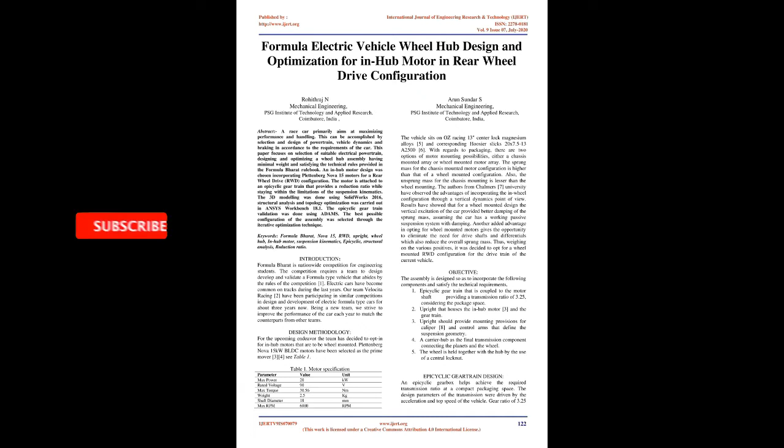Formula electric vehicle wheel hub design and optimization for in-hub motor and rear-wheel drive configuration. Abstract: A race car primarily aims at maximizing performance and handling. This can be accomplished by selection and design of powertrain, vehicle dynamics, and braking in accordance to the requirements of the car. This paper focuses on selection of suitable electrical powertrain, designing and optimizing a wheel hub assembly having minimal weight and satisfying the technical rules provided in the Formula Bharat rulebook.

An in-hub motor design was chosen incorporating Plettenberg Nova 15 motors for a rear-wheel drive, RWD, configuration. The motor is attached to an epicyclic gear train that provides a reduction ratio while staying within the limitations of the suspension kinematics. The 3D modeling was done using SolidWorks 2016. Structural analysis and topology optimization was carried out in ANSYS Workbench 18.1.

The epicyclic gear train validation was done using ADAMS. The best possible configuration of the assembly was selected through the iterative optimization technique. Keywords: Formula Bharat, Nova 15, RWD, upright, wheel hub, in-hub motor, suspension kinematics, epicyclic, structural analysis, reduction ratio.

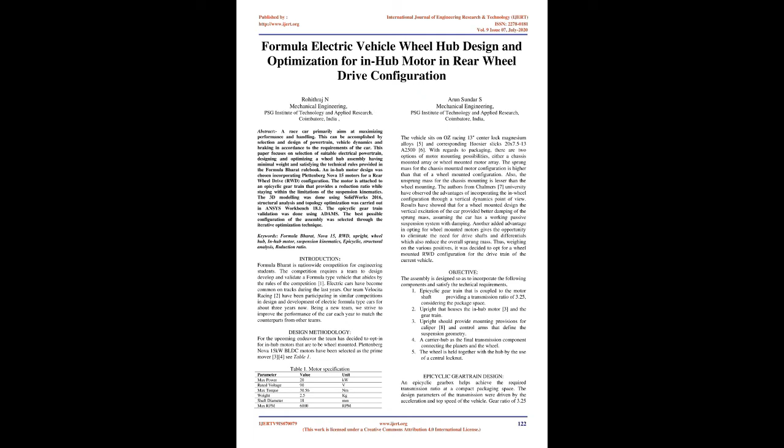Introduction. Formula Bharat is a nationwide competition for engineering students. The competition requires a team to design, develop and validate a formula-type vehicle that abides by the rules of the competition. Electric cars have become common on tracks during the last years. Our team Velocita Racing has been participating in similar competitions in design and development of electric formula-type cars for about 3 years now. Being a new team, we strive to improve the performance of the car each year to match the counterparts from other teams.

Design methodology. For the upcoming endeavor, the team has decided to opt in for in-hub motors that are to be wheel-mounted. Plettenberg Nova 15 kW BLDC motors have been selected as the prime mover, Table 1. The vehicle sits on 13 inch center lock magnesium alloys and corresponding Hoosier Slicks 20x7.5-13 A2500. With regards to packaging, there are two options of motor mounting possibilities, either a chassis-mounted array or wheel-mounted motor array.

The sprung mass for the chassis-mounted motor configuration is higher than that of a wheel-mounted configuration. Also, the unsprung mass for the chassis mounting is lesser than the wheel mounting. The authors from Chalmers University have observed the advantages of incorporating the in-wheel configuration through a vertical dynamics point of view. Results have showed that for a wheel-mounted design the vertical excitation of the car provided better damping of the sprung mass, assuming the car has a working passive suspension system with damping.

Another added advantage in opting for wheel-mounted motors is the opportunity to eliminate the need for drive shafts and differentials, which also reduces the overall sprung mass. Thus, weighing the various positives, it was decided to opt for a wheel-mounted RWD configuration for the drivetrain of the current vehicle. Objective. The assembly is designed so as to incorporate the following components and satisfy the technical requirements.

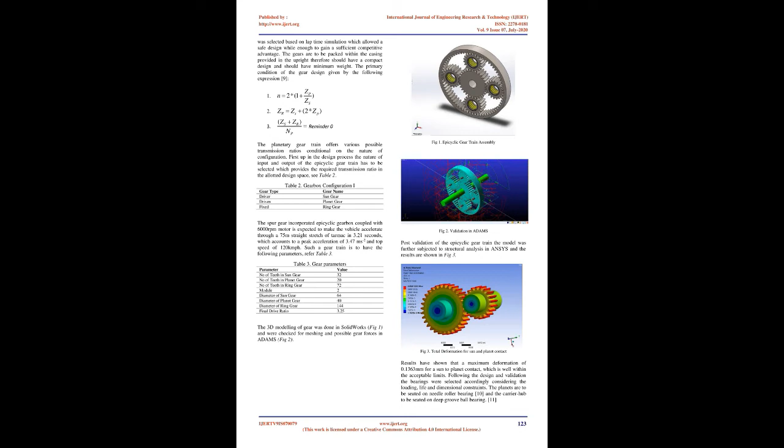1, an epicyclic gear train that is coupled to the motor shaft providing a transmission ratio of 3.25, considering the package space. 2, an upright that houses the in-hub motor and the gear train. 3, the upright should provide mounting provisions for the caliper and control arms that define the suspension geometry. 4, a carrier hub as the final transmission component connecting the planets and the wheel. 5, the wheel is held together with the hub by the use of a central lock nut.

Epicyclic gear train design. An epicyclic gearbox helps achieve the required transmission ratio at a compact packaging space. The design parameters of the transmission were driven by the acceleration and top speed of the vehicle. A gear ratio of 3.25 was selected based on lap time simulation, which allowed a safe design while enough to gain a sufficient competitive advantage. The gears are to be packed within the casing provided in the upright, therefore should have a compact design and minimum weight.

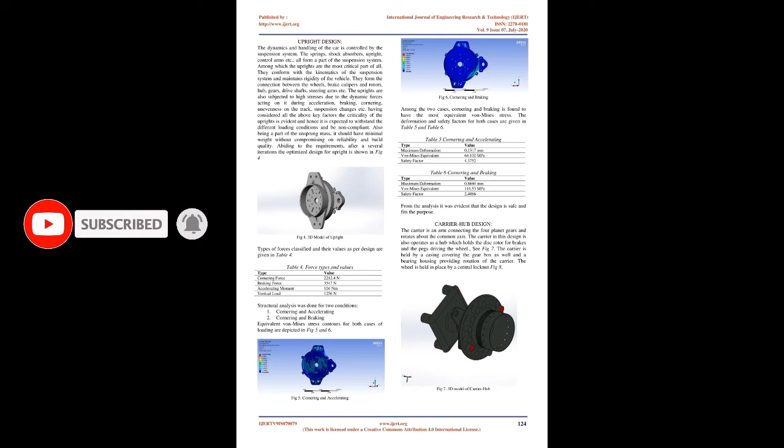The primary condition of the gear design is given by the following expression. The planetary gear train offers various possible transmission ratios conditional on the nature of configuration. First up in the design process, the nature of input and output of the epicyclic gear train has to be selected, which provides the required transmission ratio in the allotted design space.

See Table 2. The spur gear incorporated epicyclic gearbox coupled with 6000 RPM motor is expected to make the vehicle accelerate through a 75 m straight stretch of tarmac in 3.21 seconds, which accounts to a peak acceleration of 3.47 m/s² and top speed of 120 km/h. Such a gear train is to have the following parameters.

Refer Table 3. Results have shown that a maximum deformation of 0.1363 mm for a sun-to-planet contact, which is well within the acceptable limits. Following the design and validation, the bearings were selected accordingly considering the loading, life, and dimensional constraints. The planets are to be seated on needle roller bearing 10 and the carrier hub to be seated on deep groove ball bearing 11.

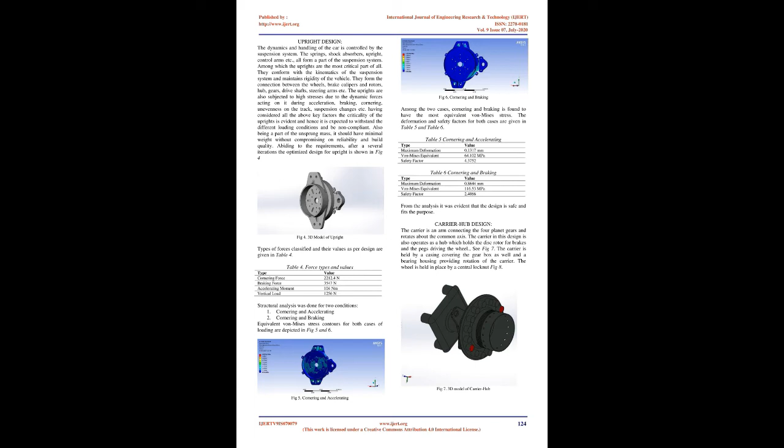Upright design. The dynamics and handling of the car is controlled by the suspension system. The springs, shock absorbers, upright, control arms etc., all form a part of the suspension system, among which the uprights are the most critical part of all. They conform with the kinematics of the suspension system and maintain rigidity of the vehicle. They form the connection between the wheels, brake calipers, and rotors, hub, gears, drive shafts, steering arms etc.

The uprights are also subjected to high stresses due to the dynamic forces acting on it during acceleration, braking, cornering, unevenness on the track, suspension changes etc. Having considered all the above key factors, the criticality of the uprights is evident, and hence it is expected to withstand the different loading conditions and be non-compliant. Also, being a part of the unsprung mass, it should have minimal weight without compromising on reliability and build quality. Abiding to the requirements, after several iterations the optimized design for upright is shown in Fig 4.

Structural analysis was done for 2 conditions: 1. Cornering and accelerating. 2. Cornering and braking. Equivalent von Mises stress contours for both cases of loading are depicted in Fig 5 and 6. Among the 2 cases, cornering and braking is found to have the most equivalent von Mises stress. The deformation and safety factors for both cases are given in Table 5 and Table 6. From the analysis it was evident that the design is safe and fits the purpose.

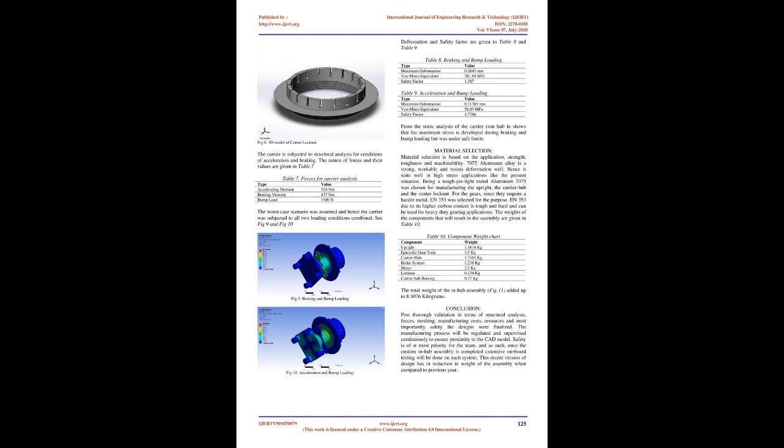Carrier hub design. The carrier is an arm connecting the 4 planet gears and rotates about the common axis. The carrier in this design also operates as a hub which holds the disc rotor for brakes and the pegs driving the wheel. See Fig 7. The carrier is held by a casing covering the gearbox as well and a bearing housing providing rotation of the carrier. The wheel is held in place by a central lock nut.

Fig 8. The carrier is subjected to structural analysis for conditions of acceleration and braking. The nature of forces and their values are given in Table 7. The static analysis of the carrier cum hub shows that the maximum stress is developed during braking and bump loading but was under safe limits.

Material selection. Material selection is based on the application, strength, toughness, and machinability. 7075 aluminum alloy is strong, workable, and resists deformation well. Hence it suits well in high-stress applications like the present situation. Being a tough yet light metal, aluminum 7075 was chosen for manufacturing the upright, the carrier hub, and the center lock nut. For the gears, since they require a harder metal, EN353 was selected for the purpose. EN353 due to its higher carbon content is tough and hard and can be used for heavy-duty gearing applications.

The weights of the components that will result in the assembly are given in Table 10. The total weight of the in-hub assembly, Fig. 11, added up to 8.1076 kilograms.

Conclusion. Post thorough validation in terms of structural analysis, forces, meshing, manufacturing costs, resources and most importantly safety, the designs were finalized. The manufacturing process will be regulated and supervised continuously to ensure proximity to the CAD model. Safety is of utmost priority for the team, and as such, once the custom in-hub assembly is completed, extensive onboard testing will be done on each system. This recent version of design has a reduction in weight of the assembly when compared to previous year.